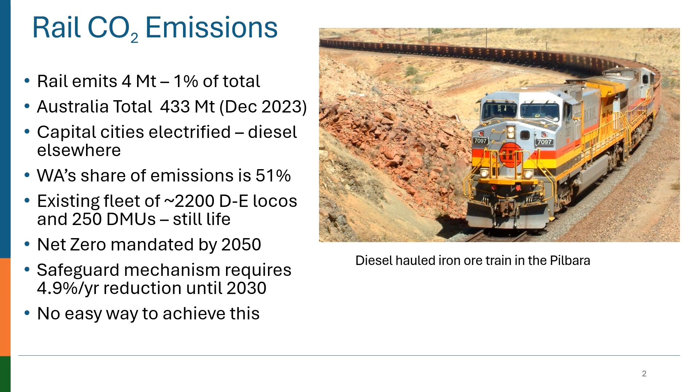There are around 2,200 locomotives and 250 diesel multiple units in Australia, most of which would still be in service in 20 years' time if it were not for the 2050 net zero target. Also, the safeguard mechanism requires a 4.9% per year reduction until 2030. There is no easy way to achieve this.

Only 3,400 kilometres out of about 40,000 kilometres of track is electrified. And at around $5 million a kilometre, it would cost around $183 billion to electrify it all.

Batteries and hydrogen are proposed as a cheaper way to net zero emissions. Batteries will allow journeys of 200 to maybe 500 kilometres, which fits the Pilbara, where all the miners are planning to go for batteries. But for the longer journeys, hydrogen is proposed as the best solution.

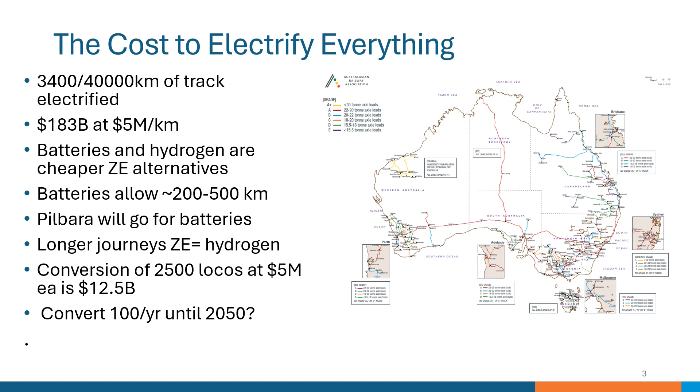Whichever technology is used, conversion of 2,500 locos and DMUs would cost at least $12.5 billion at $5 million each, with 100 a year until 2050. But imagine if there was a zero-emission drop-in replacement fuel which we could use in our existing locos.

Unfortunately, it isn't biofuel, which is only sustainable when made from used frying oil, and there is not enough of that to go around. Rail consumes about 1,500 million litres of diesel annually, which would require 4 million tonnes of grain. That is about double our total canola harvest. The trains pictured haul grain to feed the world, and displacing food production for fuel would not be acceptable.

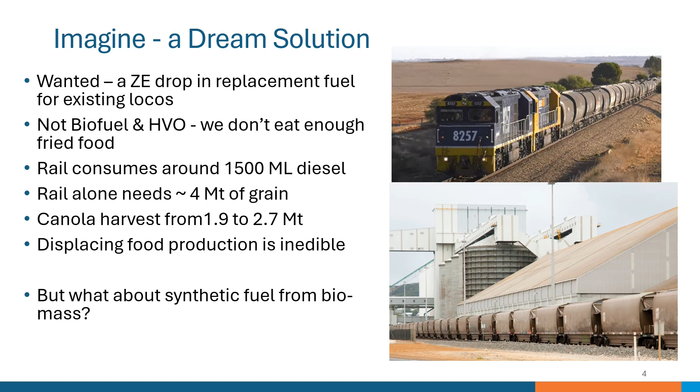But what about synthetic fuels made from inedible biomass? Dimethyl ether can be made from methanol. With heat, pressure and a catalyst, two molecules of methanol join to give one of dimethyl ether and one of water. DME has a high cetane rating and can be used in a diesel engine, unlike methanol, ethanol, methane or ammonia, which require a pilot fuel to ignite them.

It produces almost no soot, as it has no carbon-carbon bond, and for this reason was trialled in diesel buses in the late 1990s as a way to reduce urban pollution. NOx is also lower than for diesel.

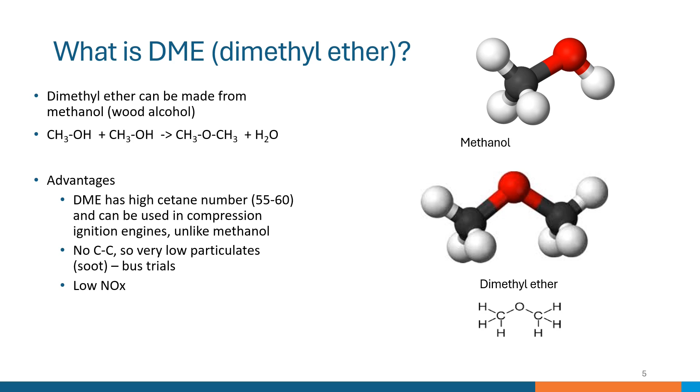But there is some downside. It is similar to LPG and is a gas at room temperature. However, it can be liquefied at moderate pressure, 500 kilopascals at 20 degrees C, a pressure which rail is used to working with in air brakes. It is a fuel like you use for a barbecue as opposed to rocket fuel.

To be useful, hydrogen must be compressed to 70 megapascals or liquefied at 20 degrees above absolute zero. Another downside is that its low viscosity makes it a poor lubricant, increasing wear on injectors. And the last point, it does have a lower energy density than diesel.

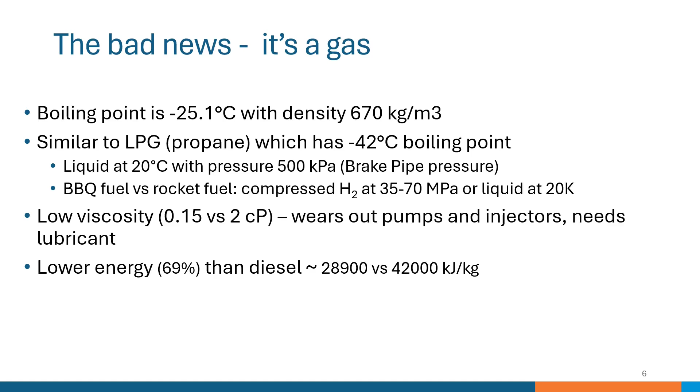But is it really net zero? CO2 is released when you burn DME or any synthetic fuel. But putting this into perspective, it is estimated 830 million tonnes of CO2 was released in the terrible bushfires at the end of 2019. But we don't count burning wood when there is regrowth. Australia's official CO2 emissions for that year were 528 million tonnes.

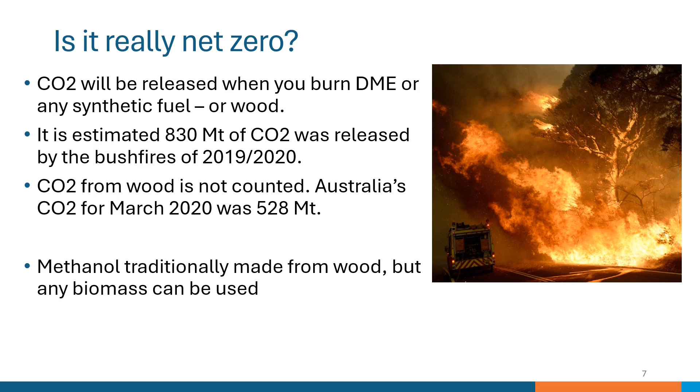Methanol can be made from wood or any biomass. The first step in making methanol is heating biomass without combustion to produce syngas. This is a mixture of carbon monoxide, hydrogen, carbon dioxide and some methane. Making methanol requires a 2-to-1 ratio of hydrogen to carbon monoxide, and syngas typically has less hydrogen than carbon monoxide.

It is therefore necessary to increase the hydrogen proportion using the water-gas shift reaction, which unfortunately creates more carbon dioxide. This could be avoided if you had a source of renewable hydrogen. But without renewable hydrogen, about 8.5 million tonnes of biomass would be required to make the DME equivalent of 1,500 million litres of diesel. This is not outlandish. Australia exports around 12 million tonnes of wood chips annually.

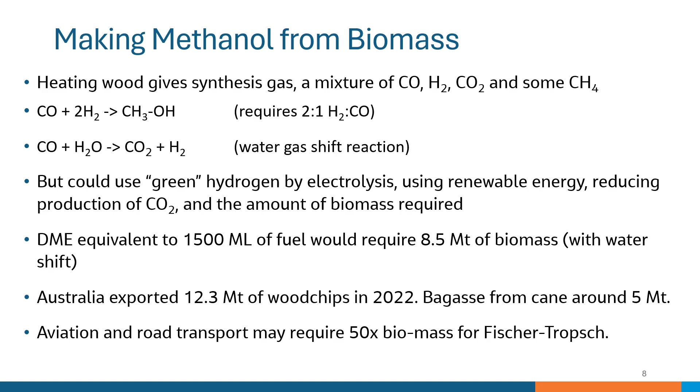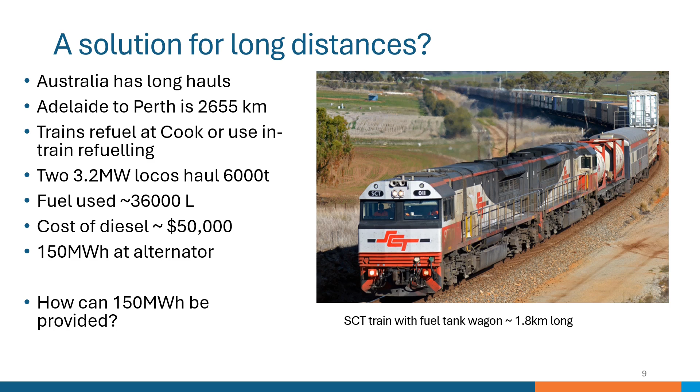No one is suggesting using batteries for this, but if you used battery electric tenders, as Aurizon is considering for medium distances, 150 megawatt hours would require 22 of them. They would take up 29% of the payload, although on the positive side, energy costs would be less than half the price of diesel.

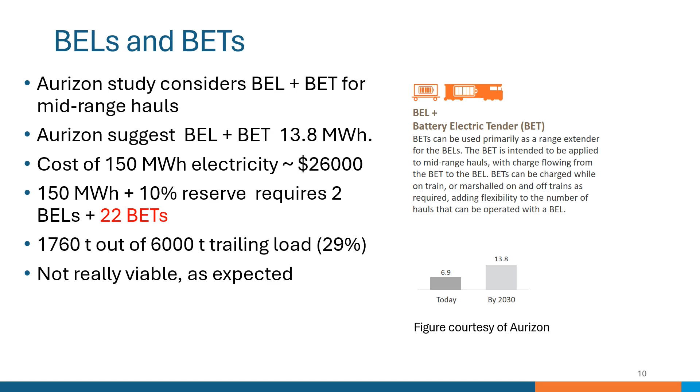For longer hauls, Aurizon are considering hydrogen electric tenders. As in the picture, these will include a tank of liquid hydrogen, the fuel cells, and all supporting equipment. So from the loco side, it looks like a large battery. 7 of these would be required to provide 150 megawatt hours.

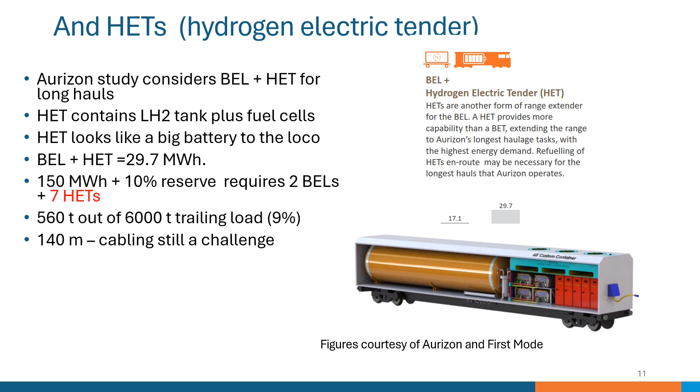This is still 9% of the payload and would need a lot of cabling. Or if supplying hydrogen through hoses is acceptable, you could put the fuel cells in the locos, with a separate tanker in between.

This is an arrangement like that used by Florida East Coast with LNG in the USA, whose diesels are modified to burn up to 80% methane. The LNG is gasified before being transferred through hoses to the locos, as this is less hazardous than transferring a cryogenic liquid, and liquid hydrogen is 90 degrees colder.

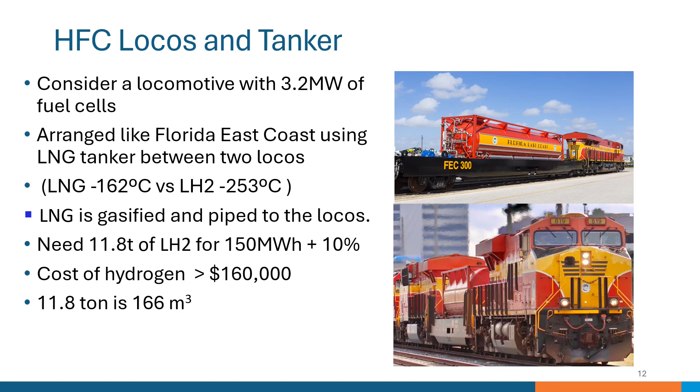With this configuration, 11.8 tonnes of liquid hydrogen would be required, at least 3 times the cost of diesel. Like LNG, the liquid hydrogen would have to be stored in a tank with an inner and an outer shell with an evacuated or insulated space in between.

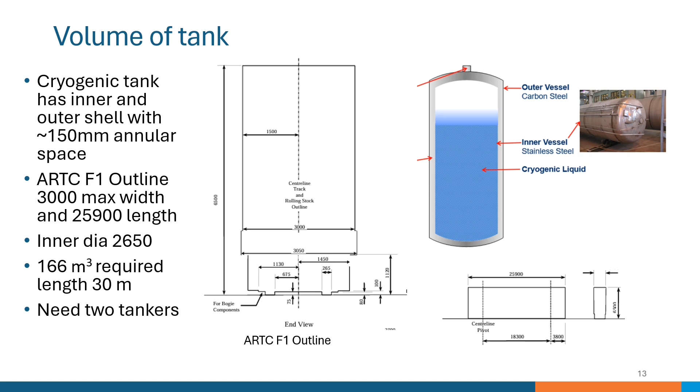Space constraints mean 2 tankers are needed for 166 cubic metres, which is not in itself objectionable. However, you need to fill the tanks, and the supply chain for liquid hydrogen requires very specialised equipment.

There is currently a trial in Victoria called the Hydrogen Energy Supply Chain. Hydrogen is made via syngas from brown coal in the Latrobe Valley and trucked to the port of Hastings, where there is a plant to liquefy hydrogen. It is then taken to Japan in the world's first ship built to carry bulk hydrogen.

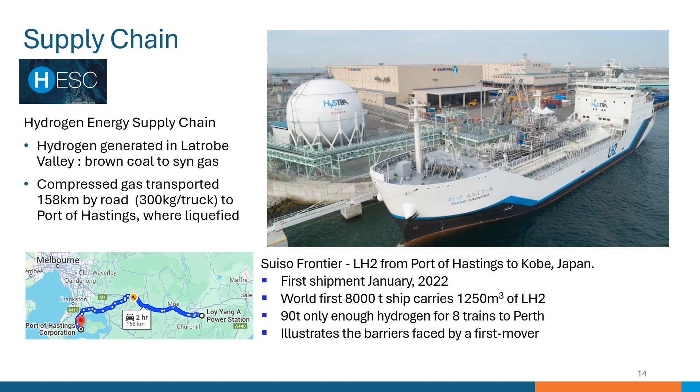The 8,000 tonne ship carries 1,250 cubic metres of hydrogen, but this is only 90 tonnes - barely enough for 8 trains to Perth. This supply chain can only function with massive subsidies and illustrates the barriers faced by an early mover.

Toyota and Hyundai began planning fuel cell powered cars long before Tesla appeared on the scene, but EVs can now match the range of fuel cell cars for less than half the price. There are very few filling stations outside of California, and even there, Shell has pulled out of the market. Nobody is buying fuel cell cars.

Nikola and others are still developing fuel cell trucks. If they find customers and a supply network is rolled out for trucks, rail could follow. The truck fleet consumes 5 times more diesel than rail.

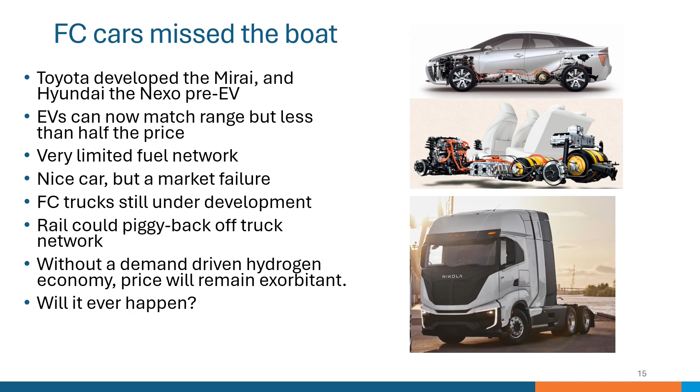But if battery-powered trucks, which can provide the range, seize the market, there'll be few customers for green hydrogen, and it will remain rare and expensive.

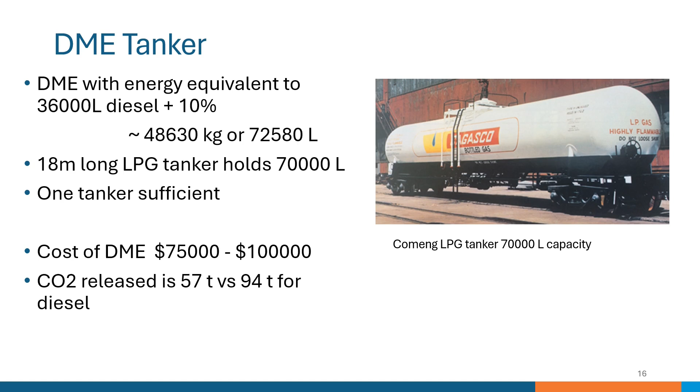Which illustrates that dimethyl ether would be a much easier solution. You would need 72,000 litres to get to Perth, about twice the volume as for diesel, but a volume which can be accommodated in a tank only slightly longer than this LPG tanker which Comeng built in the 1970s. The cost of dimethyl ether would be perhaps 50% more than diesel.

Just as for hydrogen, a supply chain for dimethyl ether would need to be established. 1.3 million tonnes of methanol per year would be needed to make fuel for half the existing diesel fleet, assuming the other half goes for batteries. Australia's only methanol plant closed in 2016, and we now import all our methanol.

However, ABEL Energy has plans to build a plant at Bell Bay in Tasmania to make green methanol for shipping. They are currently raising capital and hope to be producing 300,000 tonnes a year by 2028. 4 or 5 such plants around Australia would satisfy the rail industry.

In total, 4 million tonnes a year of biomass would be needed, which is 11,000 tonnes per day. As a quantity, that is only slightly more than one train of coal in the Hunter Valley. But typically, trains hauling wood chips are more like this one running to Albany. We would need the equivalent of 15 of these per day serving 5 methanol plants around the country.

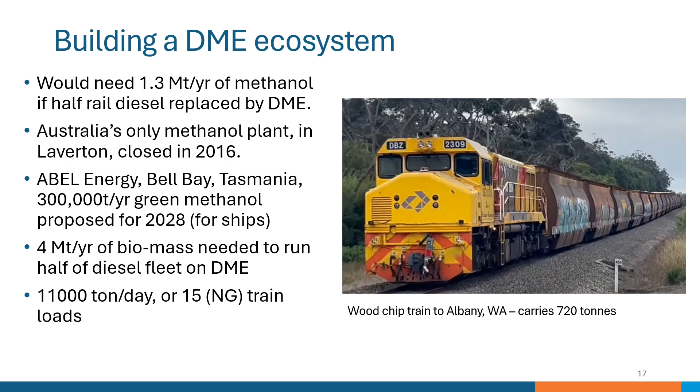Now you might be thinking, in view of the bother of DME being a gas and requiring pressure vessels for storage as well as engine modifications, would we be better off making synthetic diesel using the Fischer-Tropsch process? Unlike biodiesel, which is an ester made from fatty acids, synthetic diesel has the same properties and chemical composition as petroleum diesel oil. It burns exactly like diesel, with no engine modifications required.

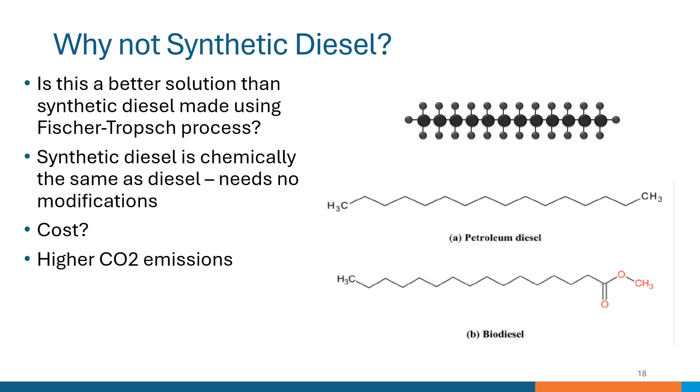The Fischer-Tropsch process was invented in the 1920s and can produce any hydrocarbon from biomass, although more usually from coal, as was the case in South Africa and wartime Germany. I don't have any numbers to back this up, but I believe Fischer-Tropsch would be more expensive. Also, having a much higher ratio of carbon to hydrogen, direct CO2 emissions would be higher than with DME.

In conclusion, the pros for DME are that it can be used in existing locomotives with some modifications. It is carbon neutral if made from biomass, and it is cheaper and much easier to store, transport and handle than liquid or compressed hydrogen. I suggest it could be a viable path for the Australian rail industry.

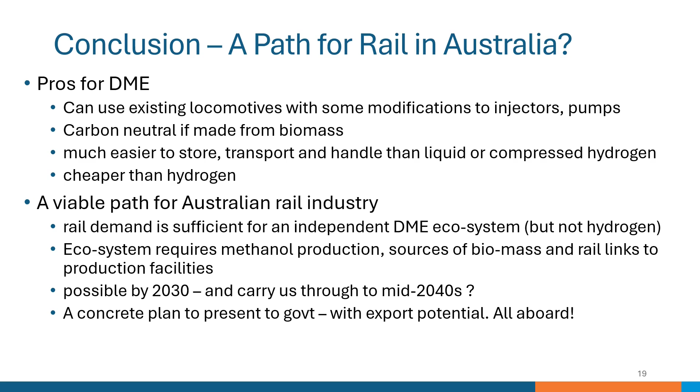Rail demand is sufficient for an independent DME ecosystem, while hydrogen requires economy-wide changes. The DME economy requires methanol production, sources of biomass, and rail links to the production facilities. If put in place by the early 2030s, it could carry us through to the mid-2040s, by which time better technologies may have emerged. This could be a concrete plan to present to government, and if successful, many other countries would be interested. So, don't send your diesel to the scrapyard just yet.